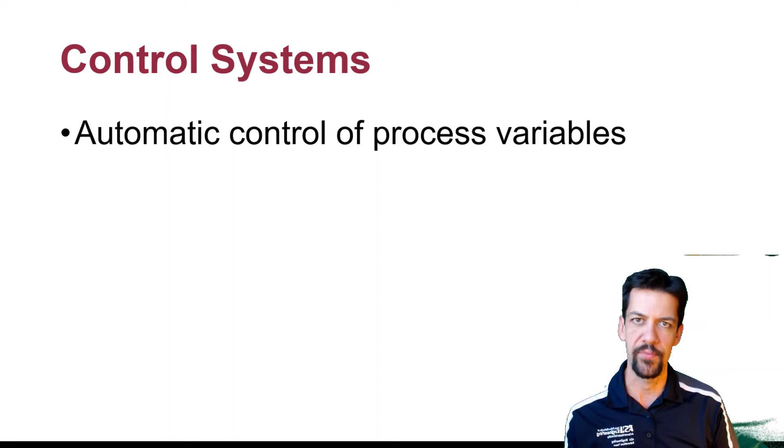Let's talk about controls. When we're talking about controls, we're talking about control systems in particular, and most of these are focused on the automatic control of process variables in some kind of system. And often they are mechanical systems where we're controlling the position of an actuator or the position of a tool or something like that in a mechanical manufacturing process, for example.

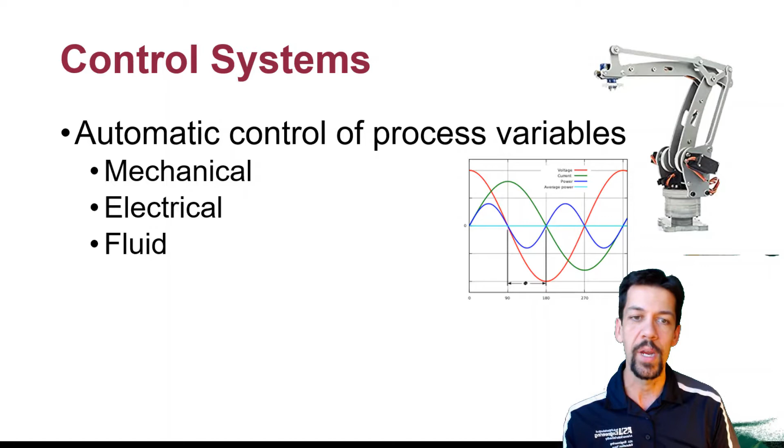They might be electrical controls where we're trying to create a specific voltage under varying conditions. We might be doing something like fluid control, making sure that we're keeping a certain amount of pressure or amount of flow in a system. Chemical controls are very common where we're trying to make sure that a reaction is happening at a particular rate or some chemical process is occurring, a temperature is being maintained, all kinds of stuff like that.

There's even such a thing as financial controls, like putting more money in or taking more money out as the stock market changes to maintain a certain level of return on a set of investments. We can even have biological control systems that monitor biological reactions or biological systems like culturing bacteria or for the generation of pharmaceuticals or all kinds of different things.

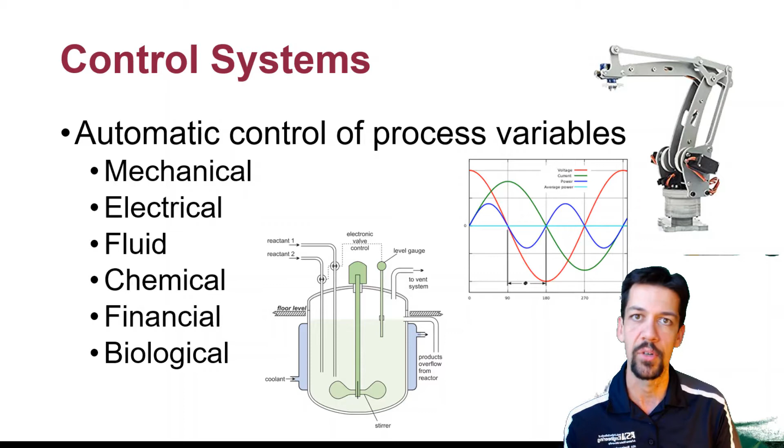There's a couple of main types of controller designs. The first kind is open loop controllers, and these are control designs that have no feedback. We're not sensing the position or anything about the system itself. We are just sending a signal and hoping for the best.

The types of things that are like this are our motor controller without using the encoder sensors, where if we're not using the encoders, we are just hoping that we're reaching some speed. And typically we just set it and forget it and hope for the best. These are things that don't give us actual feedback on whether or not we've reached the goal of whatever variable we're trying to control in the system.

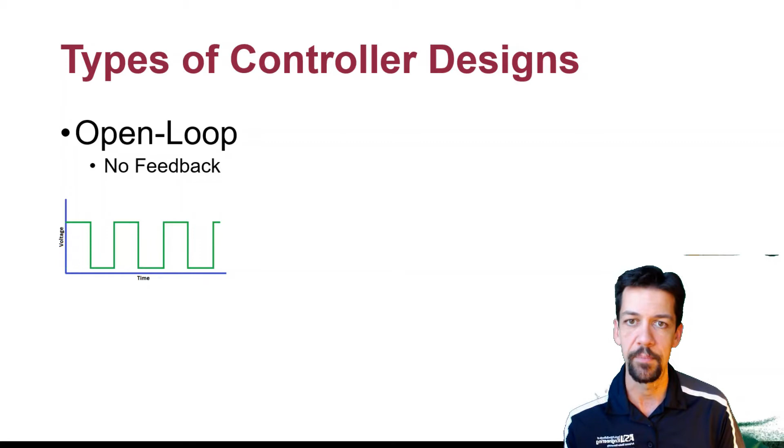Closed loop controllers, however, do have feedback. In this case, we have our input, which is whatever our control signal is, being fed to the plant, which is the system that we're controlling, and that could be a mechanical system, it could be an electrical system, it could be the motors on our robot.

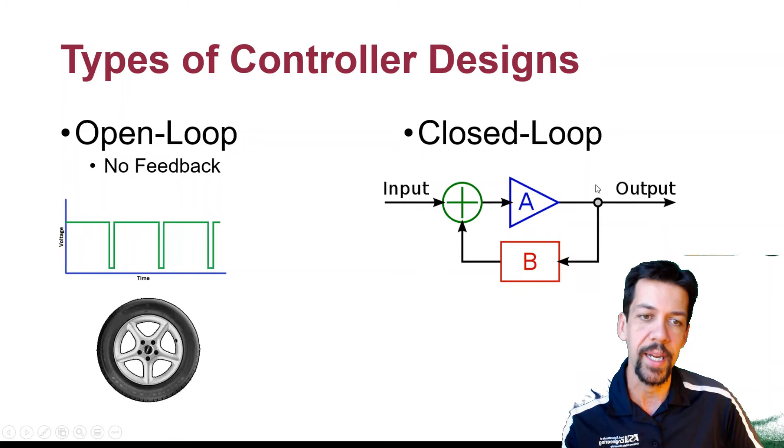Then that generates some kind of output that we are then measuring using a sensor that gives us information about how close we are, and based on that information we can create a new control signal that gets fed back into the plant, and this closed loop makes the system control better, right?

Here's two examples of open loop and closed loop control, and in both of these we're trying to control the position of the end of this pendulum. So on the open loop side, we just move the base of the pendulum to our target area and see what our error is, right? We want to minimize the angle of the arm, but we can't measure anything, so we just move it to our 0.5 position and hope it gets there and it's okay.

However, in the closed loop part, we have very tight controls where we're observing the angle of the pendulum, and we can modify the speed of the carriage so that it ends up in the location much faster than if we had an open loop control. And this gives us a lot of precision control over a system that has a lot of unknown dynamics.

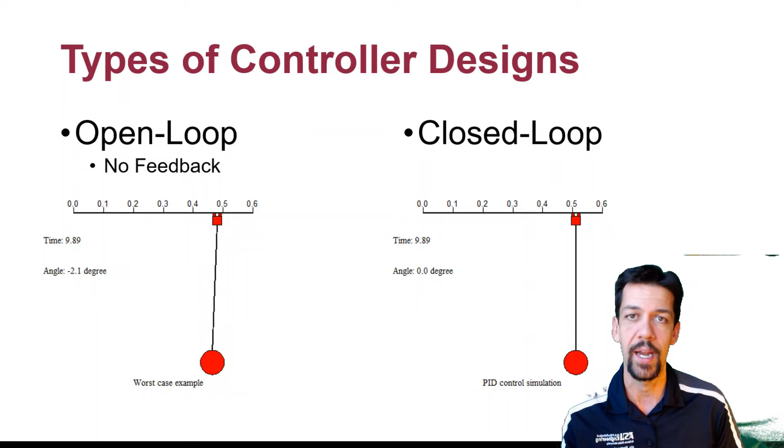So the most basic controller that is closed loop is an on-off controller. These are super common because you'll see them in thermostats and heating, ventilation, and air conditioning units. And basically a bang-bang controller or an on-off controller says, rather than having levels of control, like controlling the speed or intensity of the fan, it's either on all the way or it's off all the way.

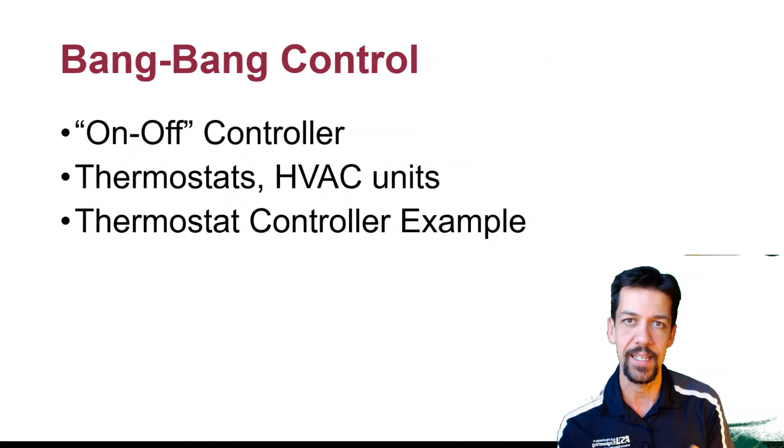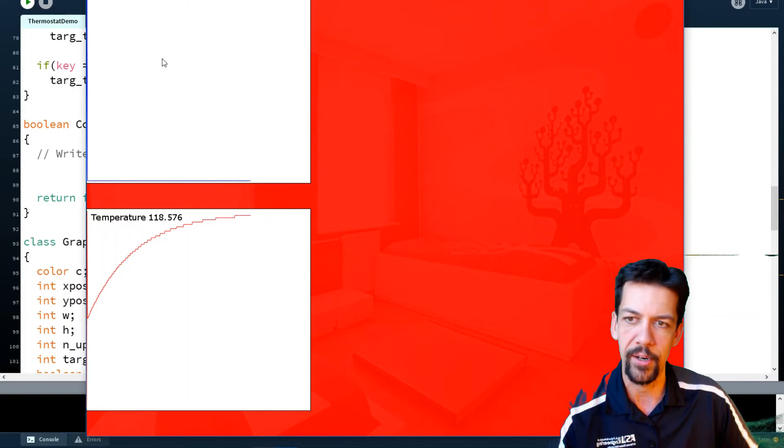And that's why it's a bang-bang controller, because we have no finesse in here. Let's look at an example in a simulated thermostat environment. So this is our thermostat environment, and you can see it's Phoenix in the middle of the summer, and because our control is 0 at this point, we have no control and the room just gets hotter and hotter and hotter, right? So let's write a controller for this configuration.

So what we have as inputs to our controller are the temperature and the previous last state. And we're just going to go with a real simple controller that says if the temperature is greater than our target temp, then I want to return true. That turns on the air conditioning system. Return false, right? Very straightforward. So let's run this and see what happens.

So here we go. We are keeping at a very steady 72 degrees, and we've got just a little bit of fluctuation in here, but you can see that our controller is switching very, very quickly between on and off. This is a really, really big problem, because if my AC is switching on and off very, very quickly, that's putting a lot of load on my air conditioning system.

The most strain comes from when the system turns on from an off state. It takes a whole bunch of current to get the fan moving, the compressor has to spin up, all that kind of stuff. So my AC will burn out very, very quickly if I don't do something about it.

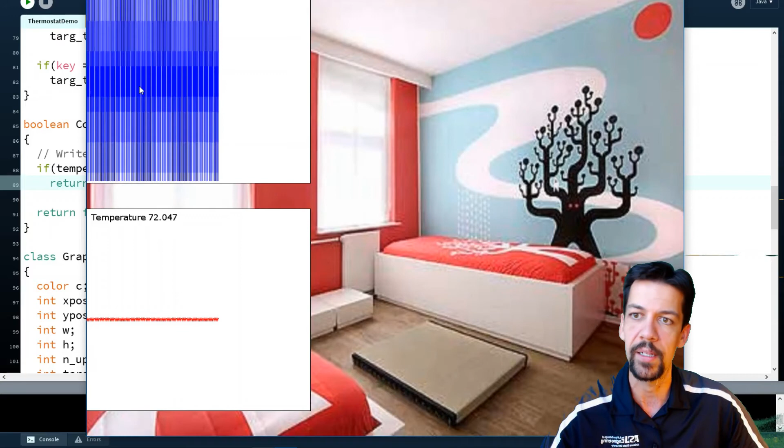So now we've made some modifications to our controller to incorporate a delay, and your actual home thermostat does this. If you watch it after it changes, it'll put in a wait cycle before it does one change or another. So in this case, I've got an external counter, and I have it incrementing every time the controller counts. As long as that count is less than 50, it's not going to do anything. It's just going to do whatever it was doing before.

Once it is greater than 50, once that delay time has passed, it resets the counter and then decides whether to turn it on or off. So let's see what happens in our room now. So here we are in our room. We can see that it's bouncing. Looks like it's bouncing between about 85 degrees and about 60 degrees. So this one is not doing a great job of keeping the room at a cool, even temperature.

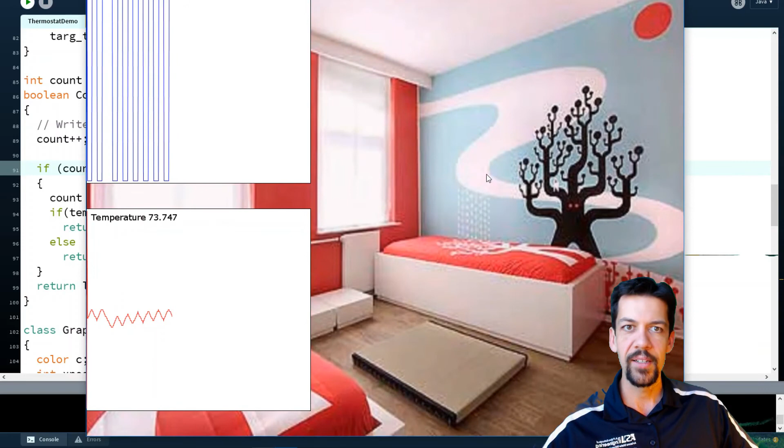So what we can do is we can actually just make this a little bit shorter, and this defines sort of the thrashing. If these are by minute, 10 minutes on, 10 minutes off, 10 minutes on, 10 minutes off, doesn't really matter that much. And we can see there's a little bit of fluctuation here, but we're keeping it much more even.

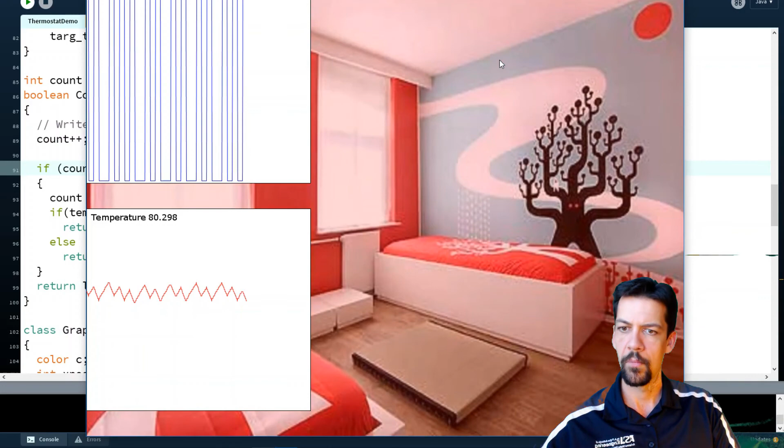If we try to increase the set temperature, we can set that and let it rise a little bit higher. We saw that it rose up, and now our average set temperature is a little bit higher. If we drop our set temperature, then we can see that it cools down and it stays in that level. So this is a bang bang controller. It's only going on and off.

And the big deal here is that to get really smooth behavior out of a bang bang controller, you have to have it switch on and off really, really quickly. And that's kind of what the motor control system is doing on our robot. We're getting fine speed control of the motor by using PWM, which is switching the motor on and off very, very quickly. We can't do that with an AC system, so we have to have some delays in there, and that introduces error in the ultimate process variable.